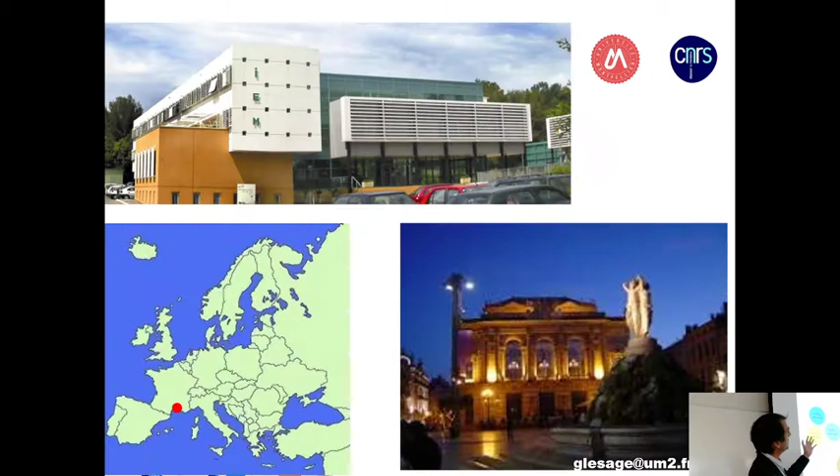The context of this project is linked to the fact that the title is 'From Wastewater Treatment Plant to Water Recovery Factory, Resource and Recovery Factory.' This means that before, we were used to calling the place where we treat wastewater a wastewater treatment plant. Now we shift to something new and say okay, waste is not only waste, it could be a resource.

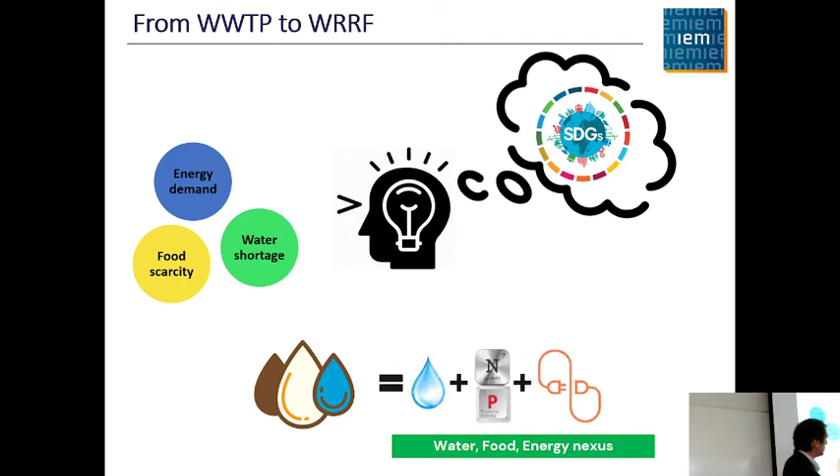Resource of what? Resource of energy with the carbon, resource of nutrients with nitrogen and phosphorus, and resource of water, of course, because in wastewater, 99.3% or so is water. So our research is dedicated to fit the Sustainable Development Goals from the UN, and to solve some problems linked to the water, food, energy nexus.

The conventional way to treat wastewater uses well-known aerobic processes, activated sludge, conventional activated sludge. Those figures say that if you want to treat 100 kilograms of chemical oxygen demand - the organic content, which is the main pollutant in wastewater - we have to spend around 100 kilowatt hours, and we will produce a big amount of sludge to be disposed of, which will also cost a lot.

We will lose some heat, and at the end we will produce treated water, an effluent that could be discharged into the environment to fit the regulation. So we are able to have a really good quality of water.

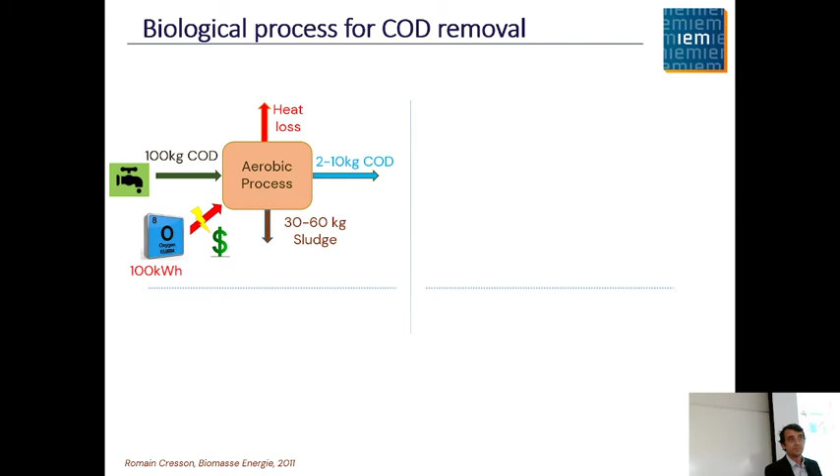But the trouble is linked to this energy demand. I found these figures - not so recent, but good to keep in mind - that in the world there is only 20% of wastewater which is treated. The Sustainable Development Goals from the UN say that we want to treat the maximum amount of wastewater, so we want to increase wastewater treatment around the world.

But at the moment, 1% of the world's energy consumption is due to wastewater treatment, which represents around 50% of USA energy consumption. So if we want to increase the amount of wastewater that has to be treated, we will also increase the energy demand, and right now we all know that energy demand is a key problem, and we want to decrease it.

That's why in our lab we shift to anaerobic processes, which have the advantage of consuming almost no energy, because we don't provide aeration and we don't provide oxygen, and oxygen aeration is the main source of energy consumption in wastewater treatment.

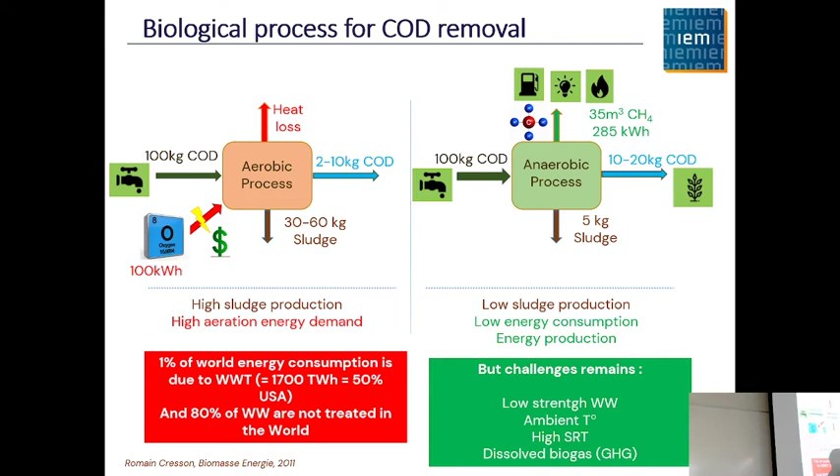There is also the fact that if we work at lower temperature, we will change the equilibrium between liquid and gas, and find more methane produced by the bacteria remaining in the liquid phase. This means we will discharge an effluent with methane dissolved in the liquid phase, which could be released later in the environment, producing greenhouse gas. So that's a trouble too.

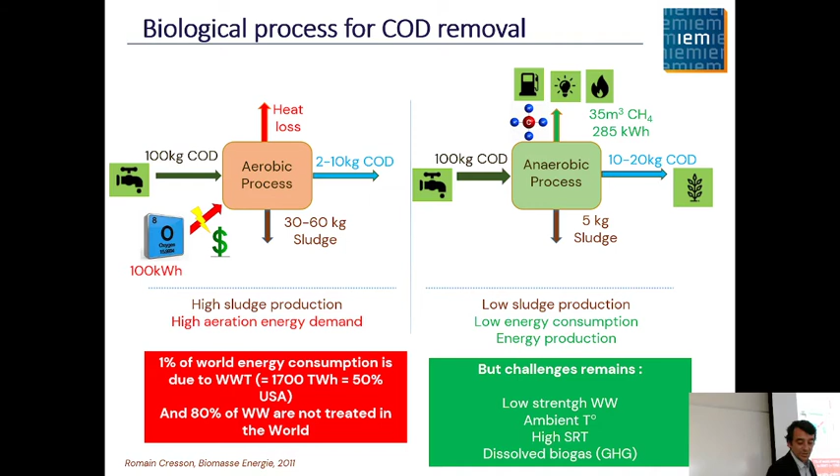So what comes just after this short introduction and comparison between aerobic and anaerobic: in the project of Lucy, we decided not only to apply the anaerobic digestion that I showed you before, but also to add some membrane, because I'm working at the Institute European Membrane, so I have to put membrane somewhere in my project. No, I believe in membrane too.

The membrane that we add is like a filter, like a coffee filter. The goal is to do a physical clarification. We'll see later, but the pore size is really low, less than around 0.04 micrometer, meaning no bacteria can pass through. So it is a physical clarification, and also a physical disinfection, meaning that at the end we produce an effluent without any bacteria.

So anaerobic digestion membrane bioreactor gives AnMBR. And granular sludge, why? Granular sludge means that all the microorganisms, which are normally found in a free mode, are flocculated, so they stick together naturally by producing some proteins and everything.

It is found also in nature that those microorganisms, after growing in kinds of flocks, grow until what we call granules. We got pictures of the granules here. It's like a semolina, something we eat like in couscous - a small ball of microorganisms. We say granules when it's over 100 micrometers in diameter, and we found in our system some granules up to 2-3 millimeters, which is becoming big.

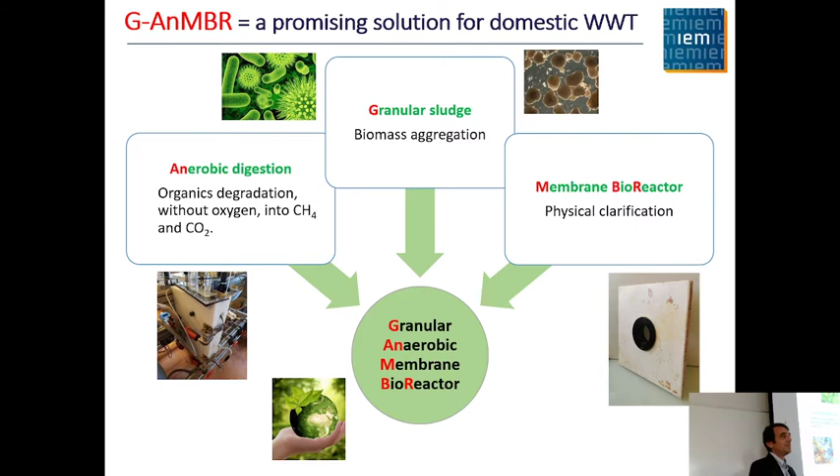It's something I already said in the previous slide, but I'll say it again with some figures added, just to be sure you remember this. Anaerobic digestion can save up to 90% of energy for wastewater treatment. We convert organic matter into CH4, so it is a source of energy. We have less sludge to manage after treatment - the interesting figure is five times less. So it decreases the cost of the global wastewater treatment plant.

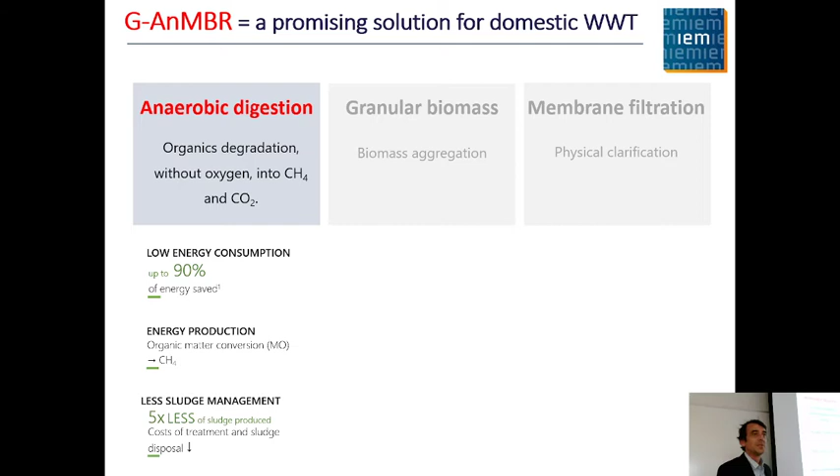About granular biomass - it's good to have this kind of slide because I forgot to tell you this also. This is really interesting, because with the granules we can have microbial or bacterial density concentration in the system much higher than conventional activated sludge, CAS. We can go up to 20, 40 grams per liter of microorganisms. This is really interesting because it allows us to intensify the process, to have in a smaller volume a bigger quantity of microorganisms, and so a more compact system, which is important when there is a problem of land capacity or land space for the water treatment facility.

So: strength, compactness, and potentially also decreased membrane fouling. In membrane fouling studies, we found what is most impactful for fouling - when you apply a membrane you want to do filtration for a long period, but after some time there is cake deposition on the membrane, some interaction between the matrix you want to treat and the membrane. This leads to a decrease of the flux, a decrease of production, so you have to clean. We know that what is really impactful in fouling is some kind of sludge - bacteria and their proteins that stick to the membrane. Some results in the literature suggest that granules promote less fouling than flocs.

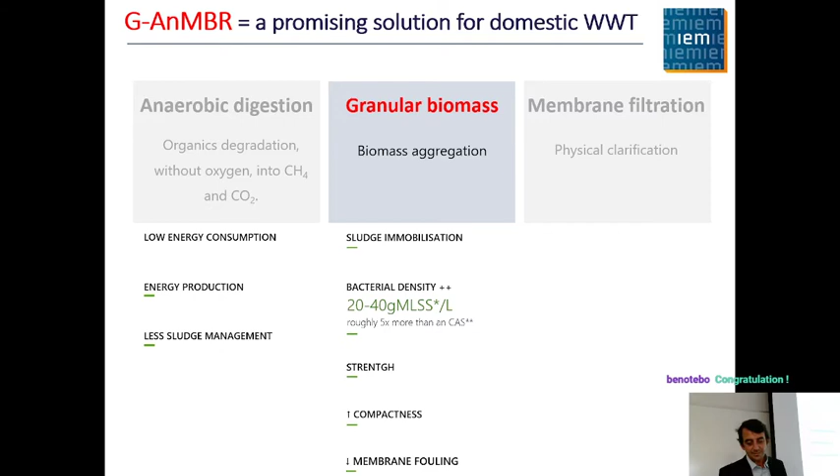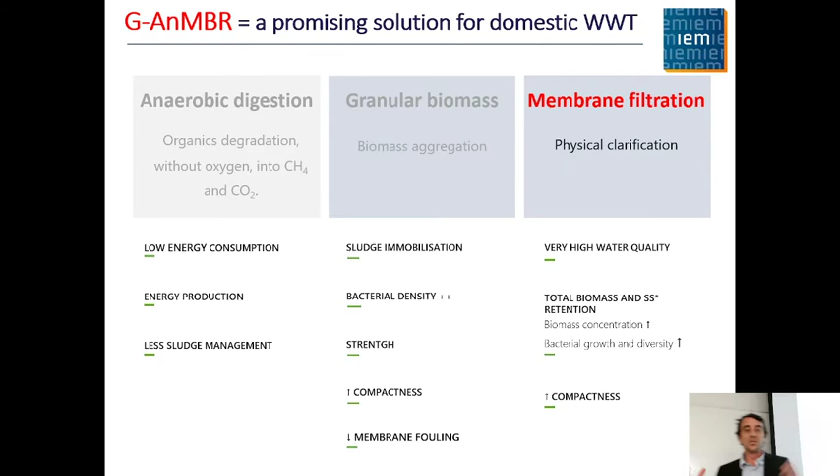So membrane filtration allows us to have really high quality water at the outlet of the wastewater treatment plant because of total biomass and suspended solid retention. It also allows for more compact systems.

So, what are the challenges? I told you before, in the domestic wastewater, we have low loading rate, so low carbon content because it's really diluted, and we have to work at what we call psychrophilic temperature. It means low temperature for those kind of microorganisms. So you could ask me, okay, you talk about low temperature, 25 degrees. It's quite high temperature. I don't know the mean temperature of the wastewater in Louisiana, but it could be a little bit less than 25 degrees. I guess that it could be around 20. In Montpellier, it's around 17.

And so if we decrease this temperature, we will have two big issues. The first one is that we decrease the biomass activities, because biomass activities is linked to the temperature. And the second one is that we increase the CH4 solubility, which leads to the loss of methane in the effluent. This loss has two bad consequences: first, we lose energy, and second, we release a potent greenhouse gas into the environment, which is something we don't want. So that's our challenge: working at this low loading rate and at this low temperature.

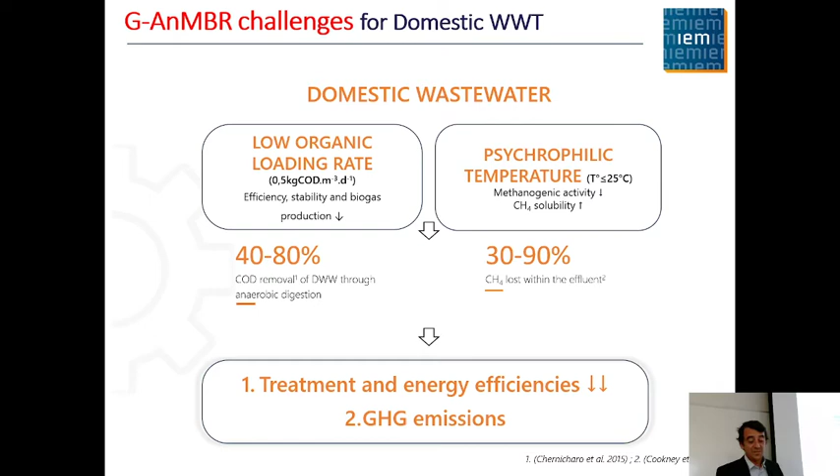And in the literature, you see this figure is quite impressive, which could lead you to ask why do that? Because I said that it's good to use anaerobic treatment to get some energy, but in the literature we found that from 30 to 90% in certain papers, in certain studies, the CH4 that we produce is lost into the effluent. So we produce energy, but we cannot get it. So it gives a bad balance, and it's not working. So that's our challenge, and I wanted to show that maybe it could work. The goal is to increase the energy efficiency and to decrease the greenhouse gas emissions potentially.

About membrane fouling also, I explain quickly that this mechanism appears, and each time we use a membrane, we have to fight against this to find some way to mitigate membrane fouling. Something we found also is that more than 70% of the energy consumed in wastewater treatment plants based on the membrane bioreactor is due to gas sparging, which is used to control the fouling. Gas sparging means that we inject bubbles at the bottom of a membrane, and with these bubbles, these hydrodynamic conditions, it allows us to avoid the formation of the cake on the membrane, permitting filtration for a longer period, but we consume a lot of energy.

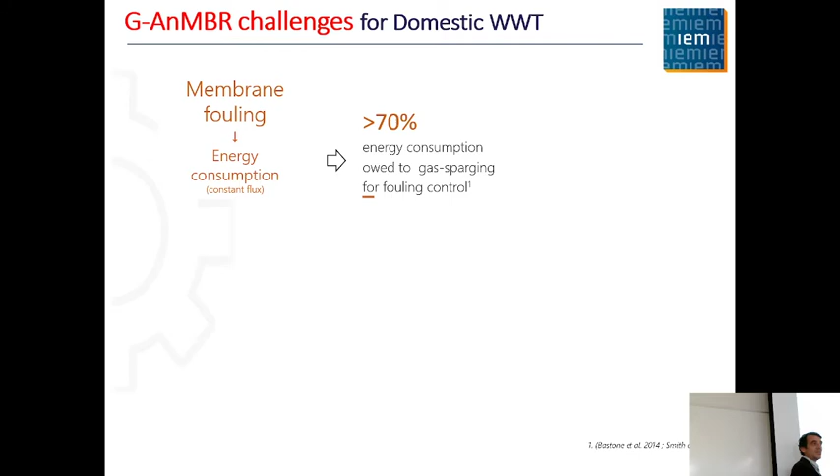Another thing is that in the literature we found that around 75% of experimental setups put the membrane outside the system. Like this, you have the bioreactor with the microorganisms, and you put the membrane outside, you do some gas sparging. It's the way to prevent fouling. This is what we found in the literature, what is conventional, because fouling is really something that membranologists, the people who work with membranes, are really afraid of. So they want to apply configurations that really prevent fouling.

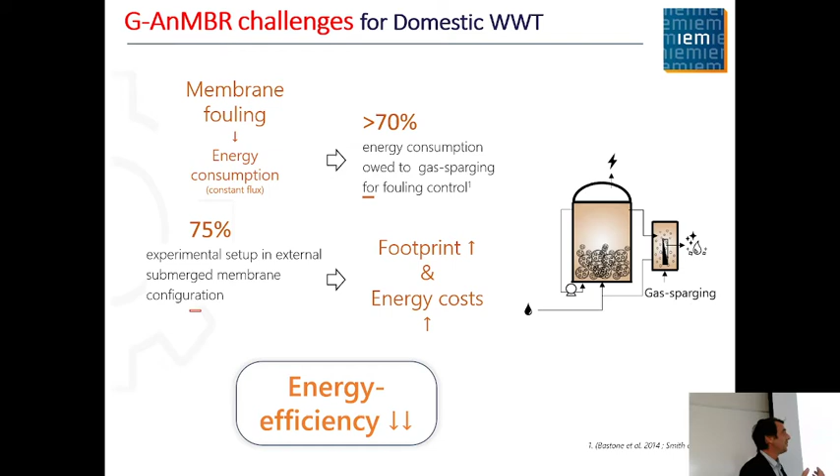So in our case, what we have done is put the membrane inside the granules, and we decided not to do gas sparging, because our goal was to reduce the energy consumption. We said, okay, if I put the membrane inside, I will have a more compact system. If I don't apply gas sparging, I will promote fouling, but it will give less energy demand. So that was the goal, to shift from this conventional system to this new system, which on paper is not the best one.

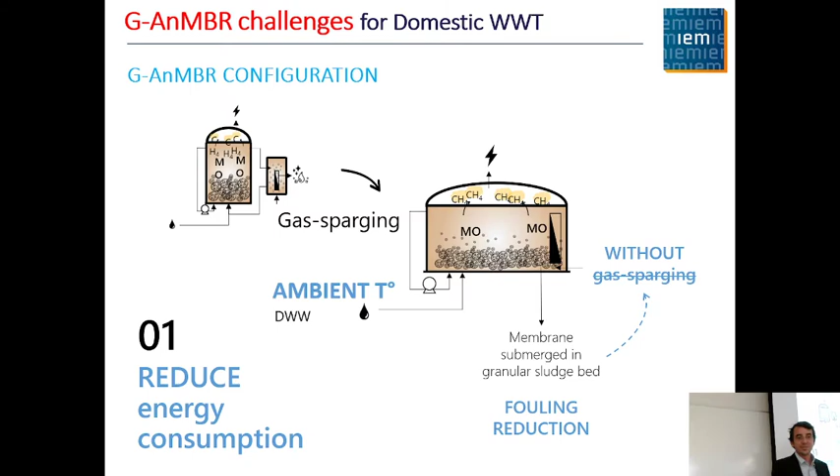Another hypothesis of using this system was that with the membrane we can retain all kinds of microorganisms - the granules, the free bacteria - but also increase the retention of dissolved and colloidal organic matter. This matter, this content, we believed would increase the biogas production potential of our system. Because of the membrane, we can retain more things, and we can have a system that produces more biogas. That's what we expected, and what we wanted to verify with this study.

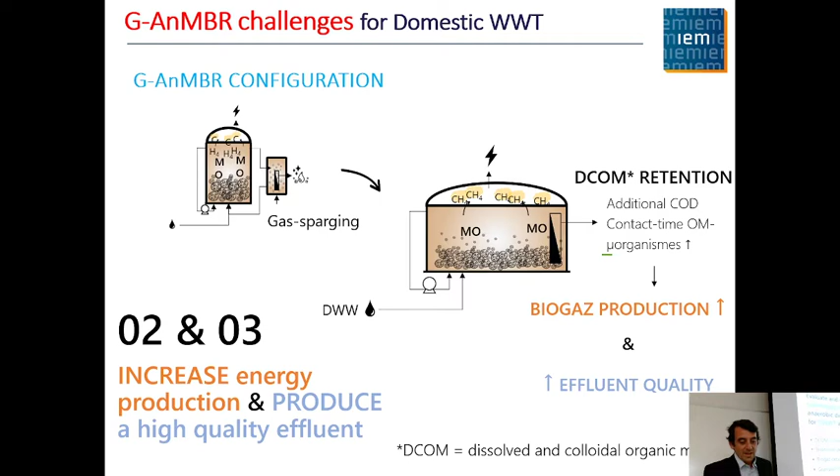So: one-stage reactor, the membrane inside the granular anaerobic digester to be more compact, for diluted domestic wastewater treatment, and low temperature.

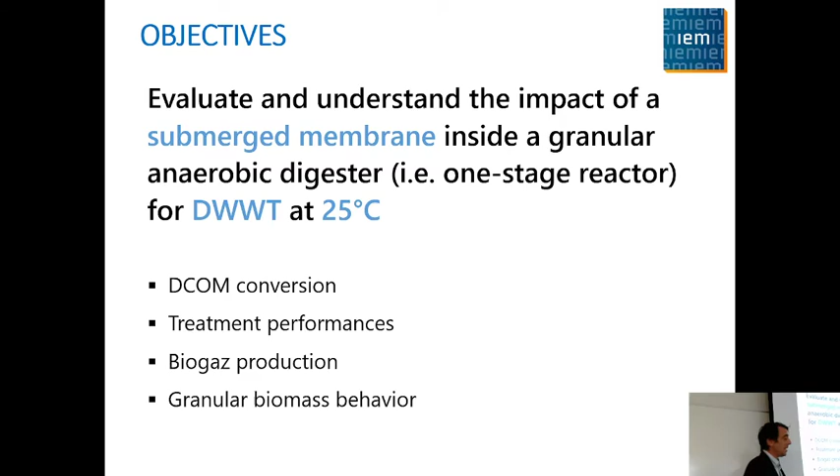About the system, about the setup we used - here you see some pictures of the granules we took. So we started with granules. We got them from a paper mill factory where they use granules to treat high loading rate wastewater.

So you see the granules, like a spatula from the lab. Those granules are quite big, I think about 1 millimeter. So we take those granules to seed our reactor and to start quickly.

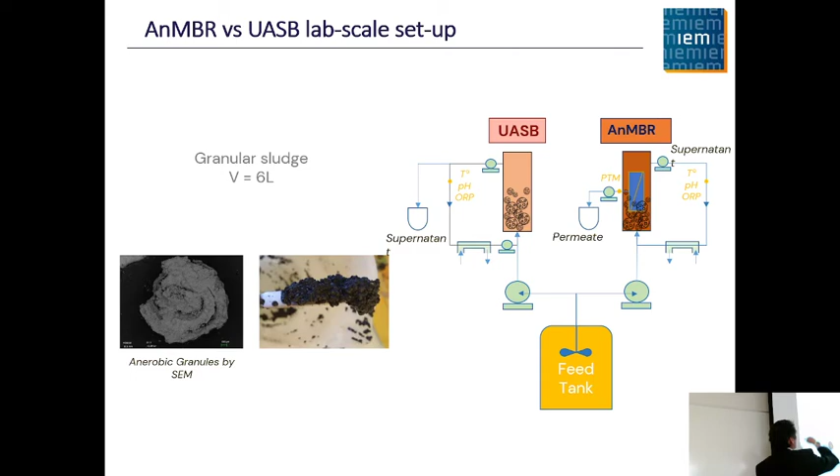Something else is the flux that passes through the membrane: 1.3 liters per square meter per hour. It's really low flux, which may be a limitation of our study. But at the start, we just wanted to show the effect of the membrane on biogas production, so we decided not to go too high in terms of membrane flux, because we could have more disturbance of the system. If we worked at high flux, we would have to clean more often, open the system, check the membrane, and so on. So we decided to work at low flux to start, just to check what's going on with the membrane.

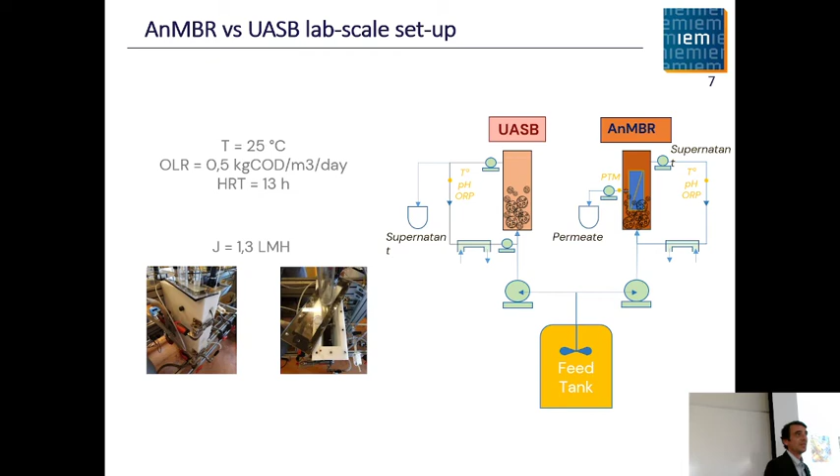In terms of analytical methods, we use the classical ones for wastewater treatment systems: organic carbon with COD and dissolved organic carbon, mixed liquor suspended solids, volatile suspended solids. We check the intermediate of anaerobic digestion, which is volatile fatty acids. 3DEEM fluorescence spectroscopy is used to study the nature of the organic matter.

For the biogas, we analyzed it in the liquid and gas phases, because there is some methane which is dissolved. We also characterized the granules with classic particle size distribution, sludge volume index, or surface area. SMA is also used to measure the activity of the granules, like a methanogenic potential activity or something.

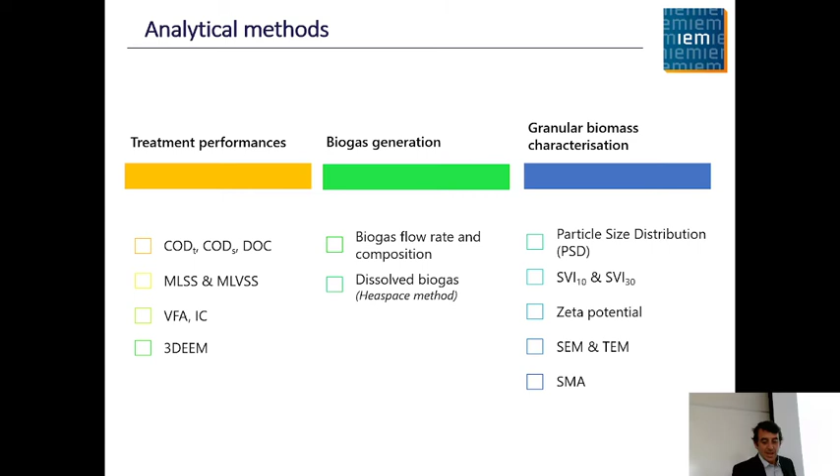Okay, so let's go to the results.

Before day zero, there was more than 1 year of acclimatization. It was during the pandemic, during the lockdown, so not so easy to conduct a bioreactor and to feed them, but it allowed us sometimes to go out from home because we had the authorization to go to the lab once a week, just to feed. So it was 1 year of COVID, and then in July we were able to go back to the lab, and we followed the system for 120 days.

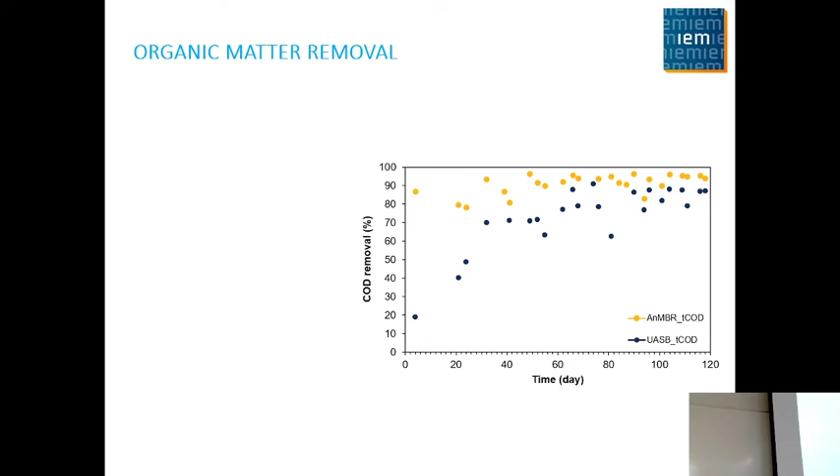What we see here is the COD removal rate for the two systems. In blue you have the conventional one without membrane, and in yellow you have the anaerobic membrane reactor. The first thing we see is that during the starting period, the membrane directly provides a really good quality effluent, around 90% COD removal. But in the UASB we have a starting period of around 30 days. So the first good result is that the membrane allows a really short starting period, and really quickly we have a system that works well.

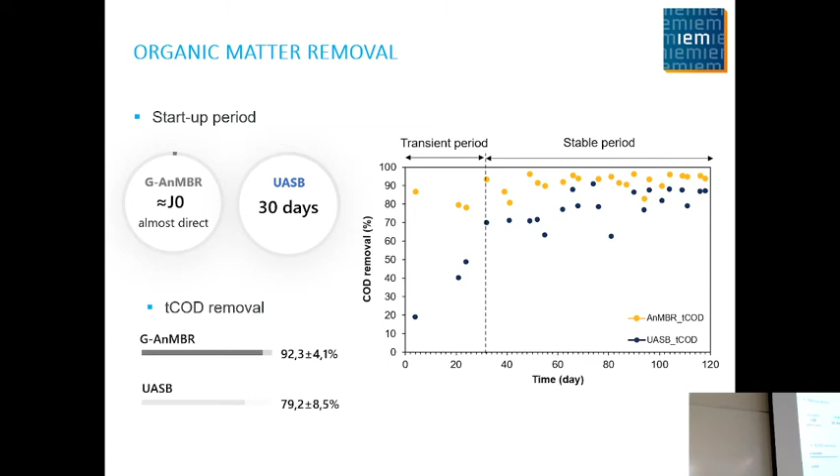Another thing that we see is during the stable period, if we do the mean COD removal of the yellow and the blue, we see that we have up to 10% more COD removed by the G-AnMBR with the membrane than the UASB. So this was the good point. You put the membrane and you can increase the removal of organic matter, so you can have a better effluent quality.

Which was really interesting, because we can reach the same quality as the aerobic treatment. So that was a good point of this.

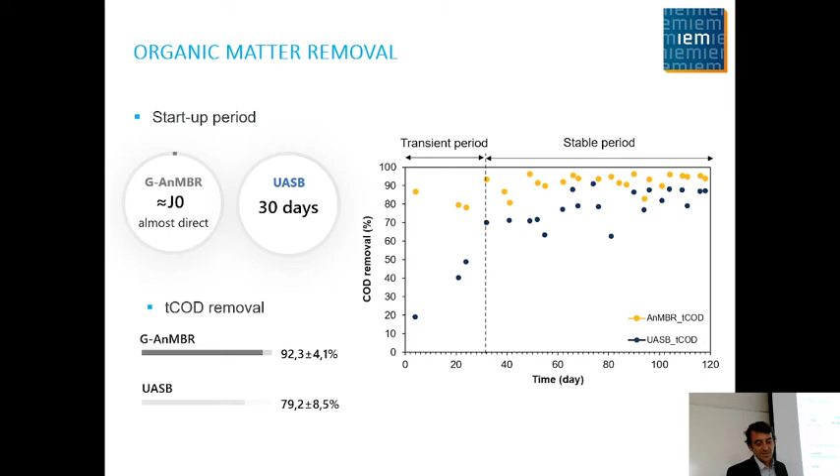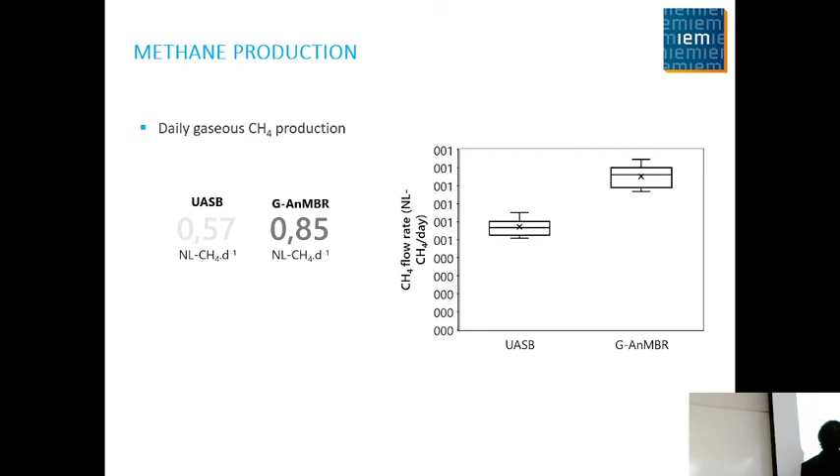COD removal study. Then we have the results of the biogas production, and you see that in the granular anaerobic membrane bioreactor, we produce more methane than in the UASB. The unit here is normal liter of CH4 per day. We produce 0.85 in the G-AnMBR in comparison to 0.57. So it's a really upgrade of the system.

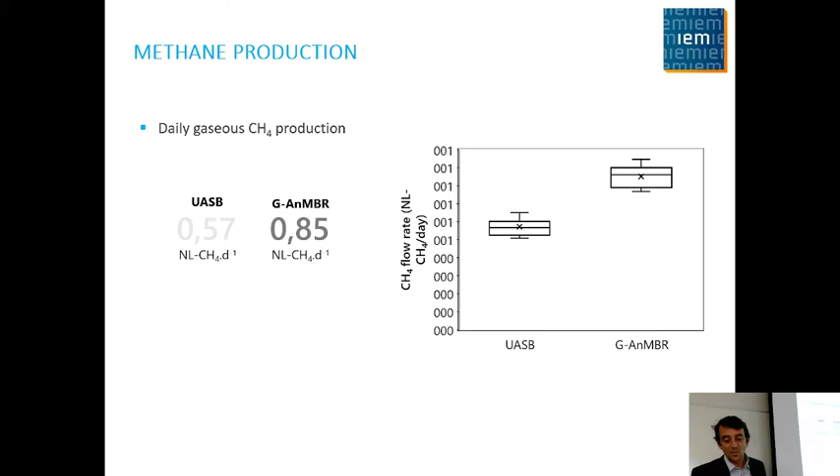So why? What's going on? Here is the mass balance of the two systems, and with the mass balance we can have the explanation of what happens between them. In the mass balance, we have the influent, so it's 100%, and then the different mechanisms of removal of the COD.

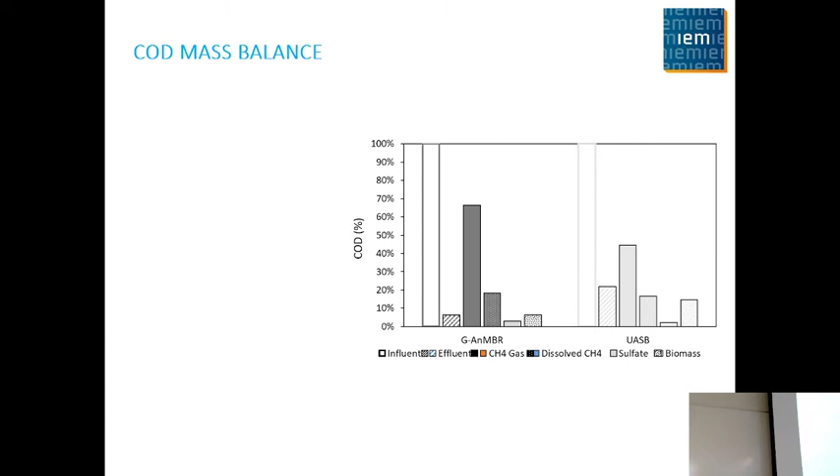So there is the effluent, there is CH4 in the gas phase, CH4 in the dissolved phase, so in the liquid, the COD which is used by the sulfate reducing bacteria, and the COD which is used for the growth of the biomass.

And what you see here is that the conversion of COD into CH4 is higher in the G-AnMBR than in the UASB. That's what we found: we produce more biogas. We see it here, and the total production is the sum of these two.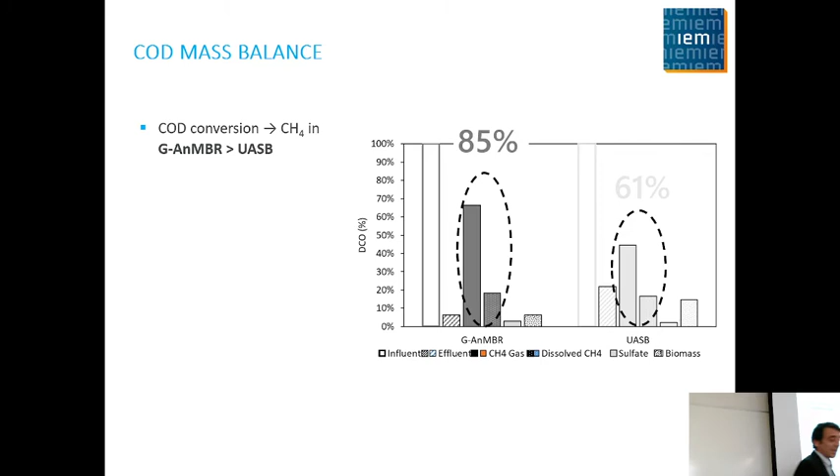What we see here is that more COD remains in the G-AnMBR. It means that in the effluent, you have less COD in the G-AnMBR than in the UASB. So this COD, which is dissolved colloidal organic matter, is retained by the membrane. Because of the long contact time between this organic matter and the bacteria, it is transformed into biogas. So the fact that we have the membrane, we can retain more content, more macromolecules that are later transformed into biogas. That's the good point of the membrane.

We had verified it by 3D EEM, which is fluorescence spectroscopy. What you see here is a map of the organic matter in the supernatant, in the content of the G-AnMBR, and in the outlet, in the permeate. This kind of map, for those who are not used to it, is in emission excitation, and the intensity of fluorescence is shown by those colors.

If it's red, it's more intensity. If it's blue, it's low intensity. So it allows us to have an idea of the kind of organic matter we have in this system, and it is divided into different zones linked to different natures of organic matter. Here we have the humic and fulvic acid, here we have the soluble microbial products, and here we have some proteins linked to biological activity.

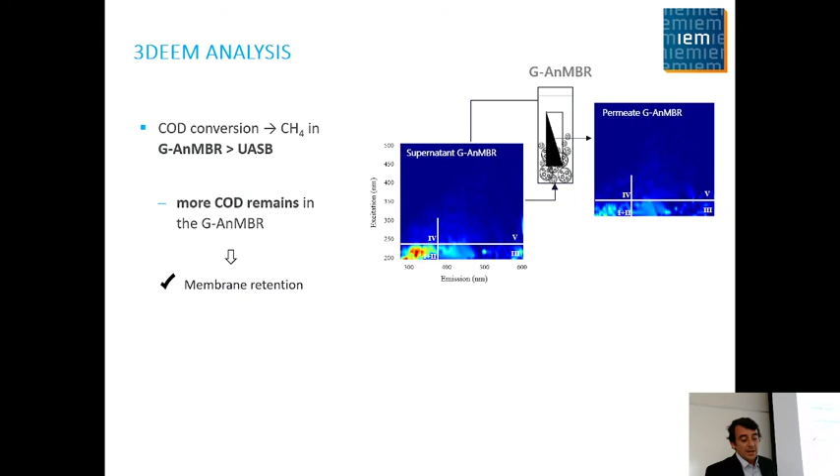So we believe that it is those compounds that are transformed into CH4, and that could explain this higher biogas production when there is a membrane — additional CH4 due to this dissolved and colloidal organic matter.

And if we compare to the UASB, you see in the effluent, in the supernatant, which is what is discharged from the UASB, we found this fluorescence in those areas. It means that in the UASB, this dissolved and colloidal organic matter is discharged. This is why we have lower biogas production when there is no membrane.

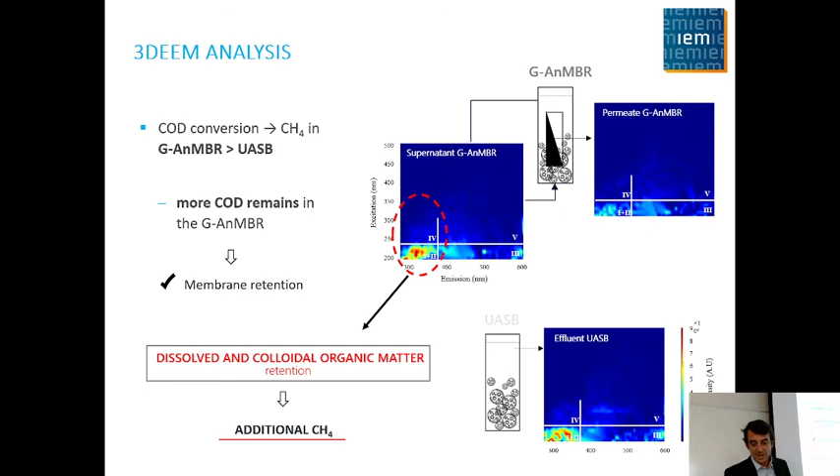One last thing related to this mass balance is that in the UASB we have more COD used for biomass growth, so potentially more biomass growth and more solids to discharge. This is another point to say that the G-AnMBR works better than the UASB.

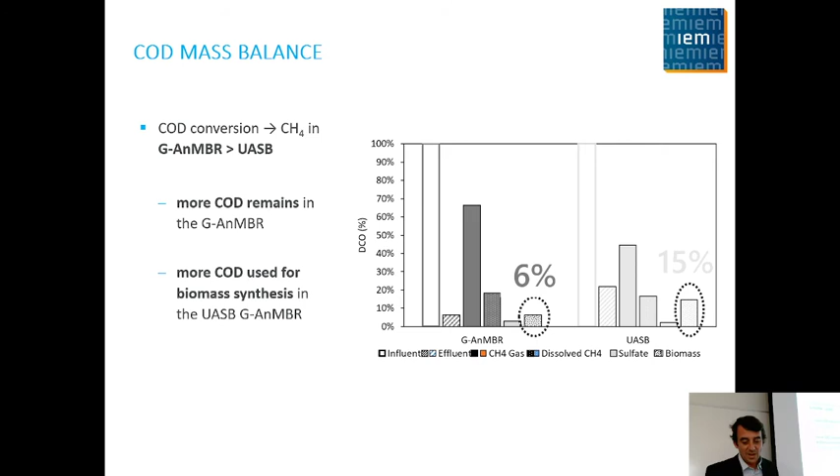So I'm going to my conclusion, the main figures of this study: in the G-AnMBR you can upgrade biogas production by 30%. You can have up to 93% COD removal, which is more than 15% above the UASB without membrane, and you can reach effluent quality really close to the aerobic one. We have also done the energetical assessment for this system.

I didn't show it in this talk, but you can see it in the publication that I hope will be published soon, that this system is positive in terms of energy. So instead of consuming 1 kilowatt for 1 kilogram of COD, we can produce energy.

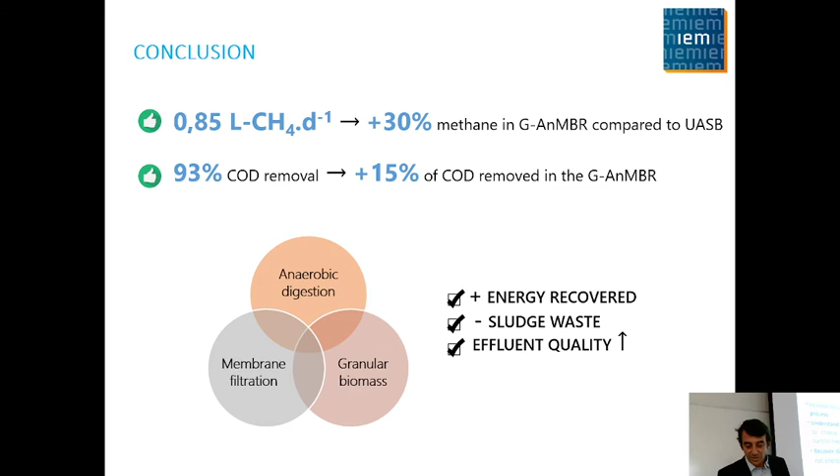We produce around 0.1 to 0.15 kilowatt per kilogram of COD. So instead of consuming energy, we produce energy by treating the water and getting really good effluent quality. To finish, what we will do later with Lucy is try to work at higher flux to intensify the process. We also have studies related to membrane fouling to understand more deeply what's going on and what mechanism leads to this fouling, which is really linked to the flux.

I also have a postdoc in my team, Kazi, who works on the recovery of dissolved methane, because at the end, around 15-20% of the methane in my study is in this dissolved part. So we are using hollow fiber membrane contactors with hydrophobic membrane to recover this methane. The results of this study have already been published, and we can say that we can recover 100% of the methane from the permeate with membrane again.